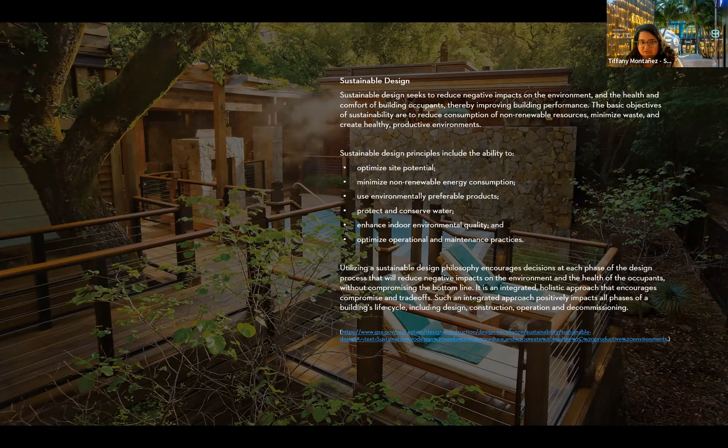Sustainable design principles include the ability to optimize your site potential. What can we utilize from the project site that can incorporate into the overall design of the project? Minimize non-renewable energy consumption. Is there ways that we can integrate renewable energy consumption, which we'll talk about in a bit, using environmentally preferred products, protecting and conserving water, enhancing our indoor environmental quality, and of course, optimizing operation and maintenance practice and the end user, making sure that we're being mindful of that.

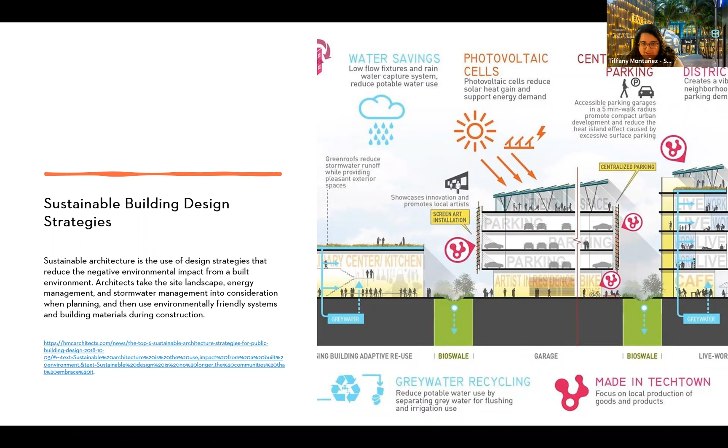Sustainable design strategies are things you can think about pretty early in the project timeline, because many times some of these will have to include specialists. An architect should be aware of many of these things, but more than not, you are leaning on other specialty consultants to advise on these things and make the right decisions. I'm going to go over a few different sustainable building design strategies that can be utilized in your project.

So the first one is passive sustainable design. Passive strategies, such as orienting your building to optimize how much sun is coming in, or if you want to minimize how much sun is coming in, making sure your orientation is accommodating to that. Being thoughtful about where window placements are, operation, maximizing wind if that is an option on your site, location of trees that may be existing.

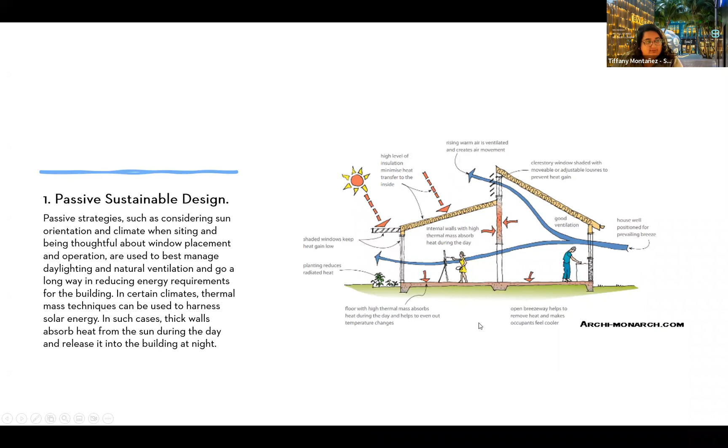Here you can see in this diagram there's different passive strategies in the sense that it is installed - it's not actively doing something, which we'll get into. We have the sun and we have a shading device that's limiting how much sun is being filtered into this space, or making sure our roofs have a good amount of insulation to control how much heat is transferred on the inside. If there's less heat transferred on the inside, your AC is not working as hard. Positioning windows and openings so that you have good airflow, also minimizing ceiling fans or limiting how much AC you'll have to use. These are all different forms of passive sustainable design.

And then you have active sustainable design. Architects will consult with mechanical, plumbing, electrical engineers to implement high efficiency systems that are designed to have a smaller environmental footprint - this project looks pretty big, but smaller. We're trying to be as least wasteful as possible, both in how we design passively to make sure things aren't working overdrive, and how we can filter atriums and green space and shading devices and different envelope systems to consider.

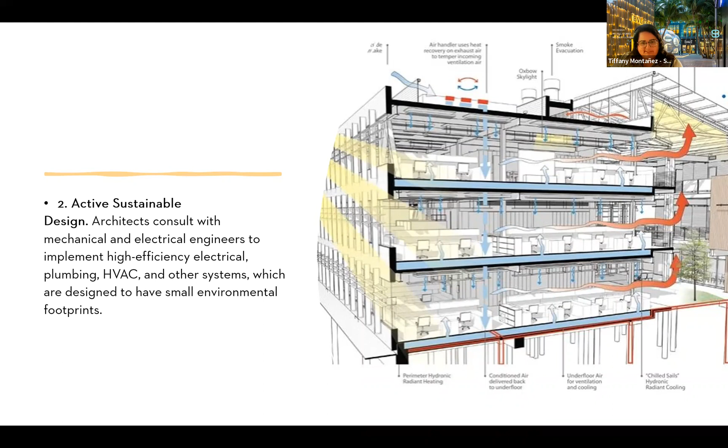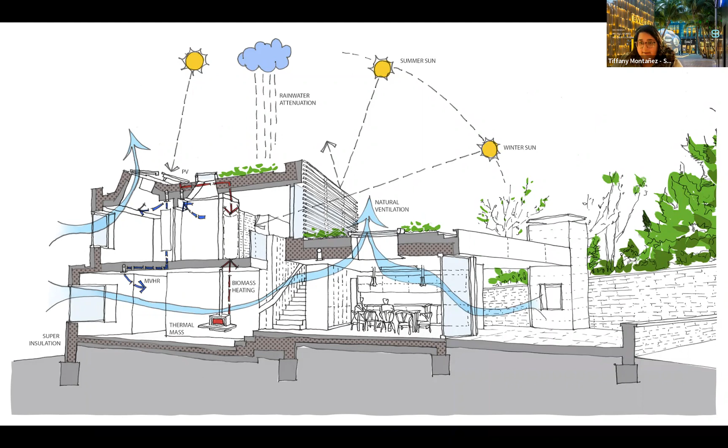How are you taking advantage of summer sun and winter sun? Summer sun is higher in the sky than winter sun. So in places like the Northeast, you want the winter sun coming into the space to warm it up, versus in the summer you'd want it as shaded as possible to keep it cool. Again, strategically placing where natural ventilation can flow through the space — these are just a few examples one can utilize.

As I'm sure you're learning, there's a lot of players that go into building a project.

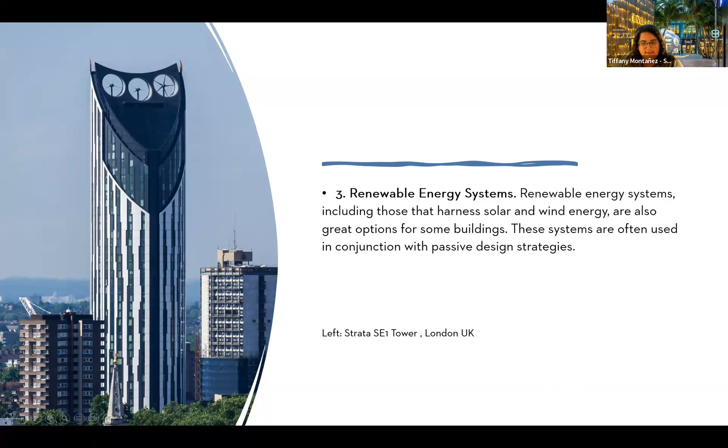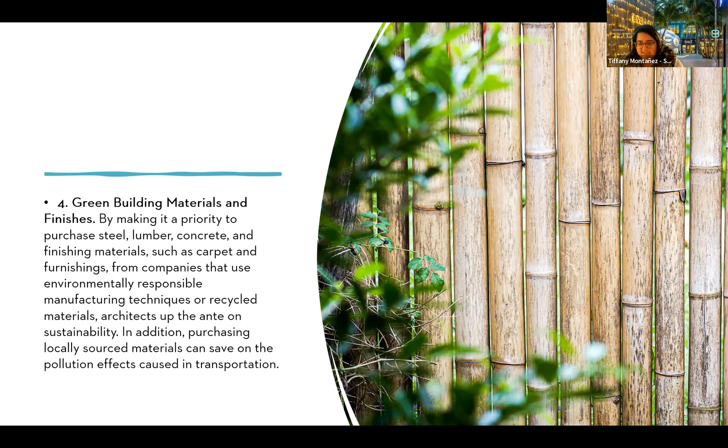Green building materials and finishes — an opportunity to be mindful not only of what products you're using, but where you're getting them from. Local is always best, not only for your carbon footprint. If you're working on a project in Puerto Rico and the roof tile you selected is only manufactured in California, that's traveling quite a ways, instead of utilizing something manufactured in Florida or closer to the island. So always be mindful of those things, making sure to utilize as much recycled material as possible. In the Caribbean, you're dealing with a lot of moisture, and certain materials will survive well and others won't, so selecting products that will thrive in the environments we're building in is also very mindful.

And then also native landscaping. Landscaping makes a huge impact on our projects. We're very lucky in South Florida to constantly be around lush environments. However, you want to be thoughtful and use plants that will actually grow in the environment you're in. If we're doing a project in Boston, planting palm trees probably isn't the best idea, even if we really want them, versus here, where palm trees, sea grapes, and all sorts of tropical plants do really well. Choosing native planting allows us to be mindful of how much water we're using, because we want plants to be successful — we don't want to replace plants often, and we want them to survive in their environment.

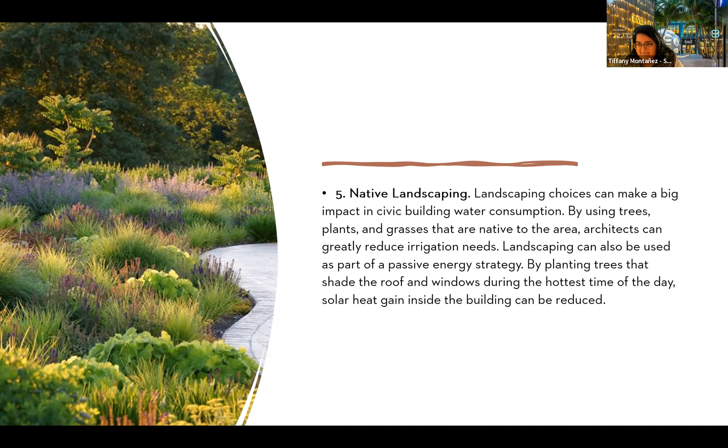Then stormwater management — something South Florida deals with intensely, in an area where for six months we're getting tons and tons of rain. And as we know, with sea levels and all those things, we need to be mindful. How are we getting water off the site? How are we collecting it? Are we reusing it? Is there purification that needs to happen? These are all coordinated with site engineers and civil engineers. You just need to make sure you're making space for those things, because those systems require space — we can't have a water collection plant without some form of tank or cistern to recycle as much of it back into the property.

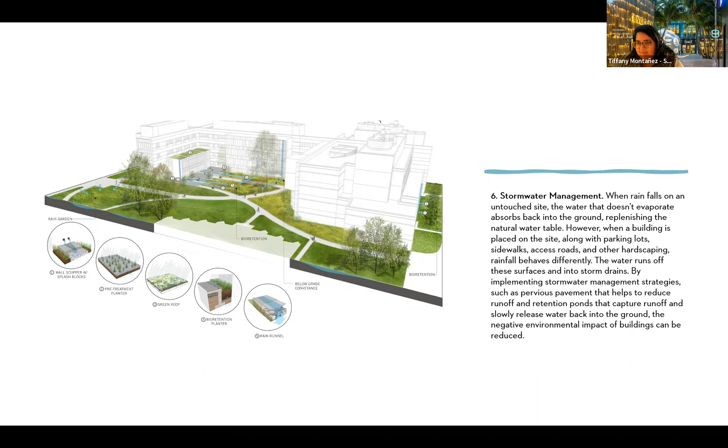Now the next component we're going to get into are different forms of certification. I'm going to go over LEED certification and WELL certification. A LEED building — this isn't a requirement for buildings to pursue, but if you're planning with a large sustainable component in mind, a lot of clients, developers, and projects will submit themselves for certification. You can be LEED certified, and then there are different tiers: silver, gold, and platinum is the highest rank you can get.

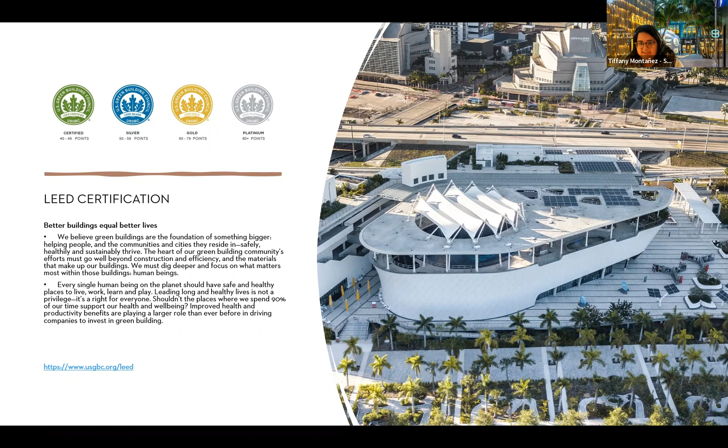And it is developed on a point system, which you'll see in the next slide. This is the Frost Museum here in Miami, that is also a LEED certified building. And then I placed a link, which you'll all get this PowerPoint.

So you can look through some of the resources available on these different certifications. LEED certification is a big matrix of different components: sustainable sites. Examples, are you near a bus stop? Do you have bike racks? Are you near public transportation? Do you have to use a car to get to the space? How efficient is your water system? Your energy and your atmosphere, how efficient are those? Are you using green power? Are the sources of energy you're using, do you have backup?

Materials and resources. Are you using local materials? Are you getting wood from Brazil all the way over here? Or are you being- oops, sorry, there's a dog in our office, sorry for the barking.

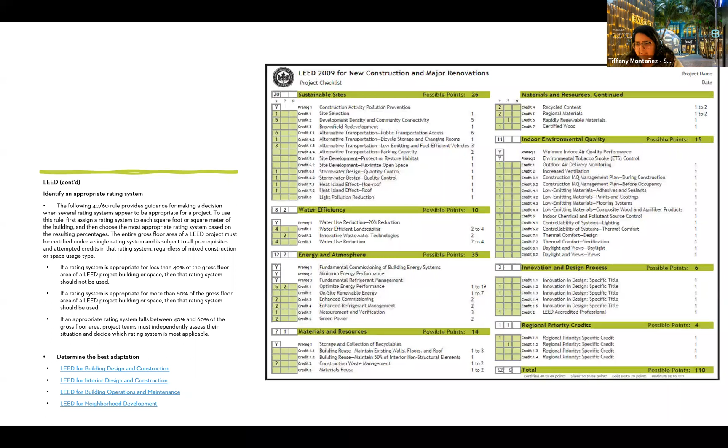Again, with indoor environmental quality, do you have good air quality in your space? Are you creating a healthy space? Which we'll get a little deeper into. And then what does your design process look like? Regional priority, and then it all collects into your possible 110 points, which this may have changed. I think it definitely has changed since from 110, and then what you can collect.

So, the WELL Building Standard is a vehicle for buildings to organize and deliver more thoughtful and intentional spaces that enhance human health and well-being. I would often describe LEED's initiative to be very much environmental focused, and well is that too, but it's also about how it impacts the end user and how it's impacting the individual within the space. So it's leaned on a lot of medical practitioners and professionals and public health experts to identify what that standard is. I think within the last decade more well certifications are popping up, and pursuing that certificate has become more relevant.

And similarly, it has a scaling system to grade yourself to. So there's 10 concepts of well: air, water, nourishment, light, movement, thermal comfort, sound, materials, mind, and community. So we'll go through air, water, and nourishment.

Air: promoting clean air to minimize human exposure to harmful contaminants in order to maximize productivity, well-being, and health. Water: increase adequate hydration in the building's occupants and reduce the health risk due to contaminated water and excessive moisture within buildings. Nourishment: support healthy eating patterns by increasing access to healthier food and beverage choices and limiting access to highly processed food and ingredients. In this first component of well, we're already starting to see the integration of the user and less of the building and its environment, just integrating that as one big thing.

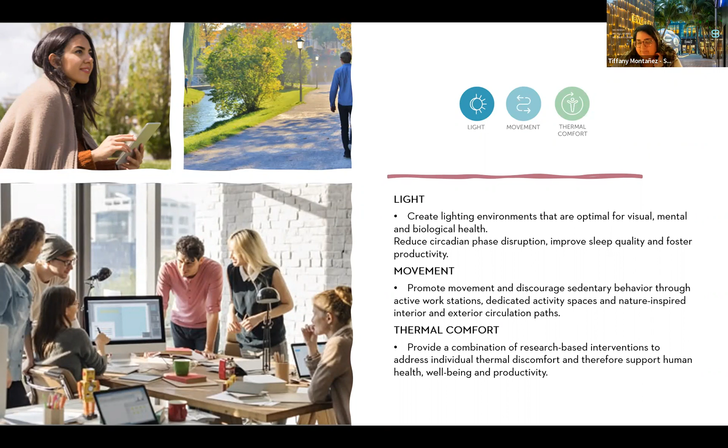The next few categories: sound, materials, mind, and community. Sound: identify and mitigate the acoustical comfort parameters that influence occupant experiences of the built environment. If you're in a library with the same acoustical echoing as a theater space, you're probably not going to be able to utilize that space as productively as you'd like. And vice versa, you wouldn't want a theater that's so silent it's not maximizing its acoustical abilities. Materials: identify, evaluate, and manage hazardous ingredients across building materials, waste, cleaning products, outdoor spaces, and landscaping to reduce risk of exposure.

Mind: implement nature-inspired design, create restorative spaces to promote resources supporting mental health, sleep support, substance abuse, and emotional well-being. And community: design buildings that are inclusive, accessible, healthy, and safe. Create policies and programs that support the needs, health, and wellness of all individuals and families. It's always great to design a wonderful project or building, but it's even better when a community can really take advantage of that.

And that's what that scoring looks like. So there are a few more categories here. It goes from bronze to platinum being the highest, and the total points achievable are 80.

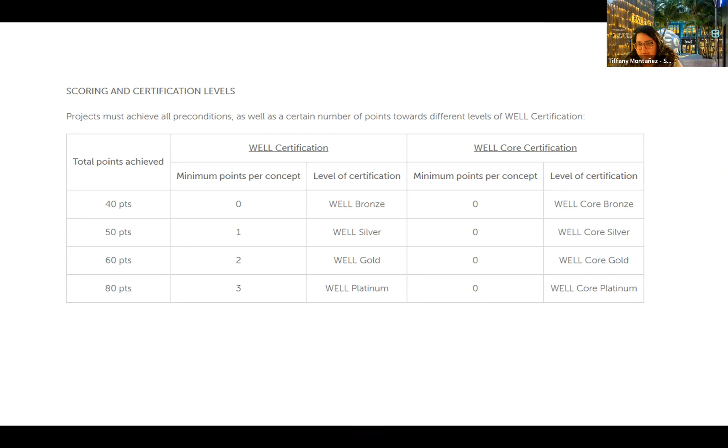We're going to go through two different case studies. First, a WELL-certified case study. This is a project in San Francisco. It was WELL-certified gold.

Some of the design highlights include maintaining extensive natural daylight and a high level of transparency that conveys the company's commitment to community sustainability and promoting employee engagement. The building's form and strategically placed louvers allow for natural ventilation on the lower 3 floors 95% of the year, significantly reducing energy consumption. The gray water system reclaims water from the showers for flushing and irrigation. The design team and client group understand the potential of the space to educate occupants and bring better awareness to its end users.

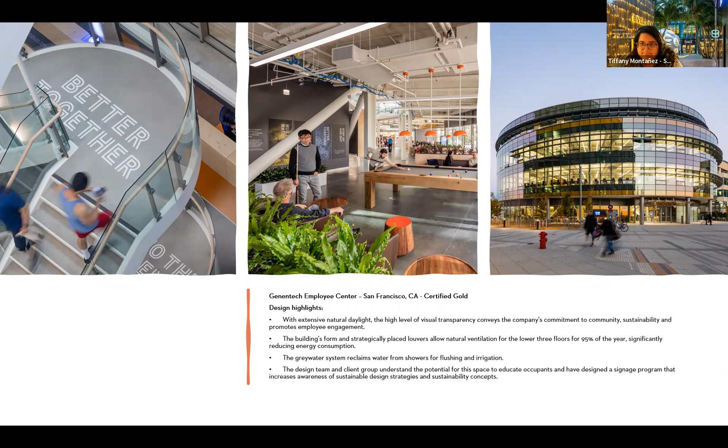It is located at the National University of Singapore School of Design and Environment and is the first purpose-built net zero building in Singapore. It's a 6-story building with a living laboratory to demonstrate and explore human-centric approaches for integrated sustainable development. It's a testament to the university's commitment to incorporate sustainability in various aspects of campus life, not only operations, but construction, research, and education. The building is energy efficient and environmentally friendly, with a suite of innovative building strategies to improve comfort and well-being for its users.

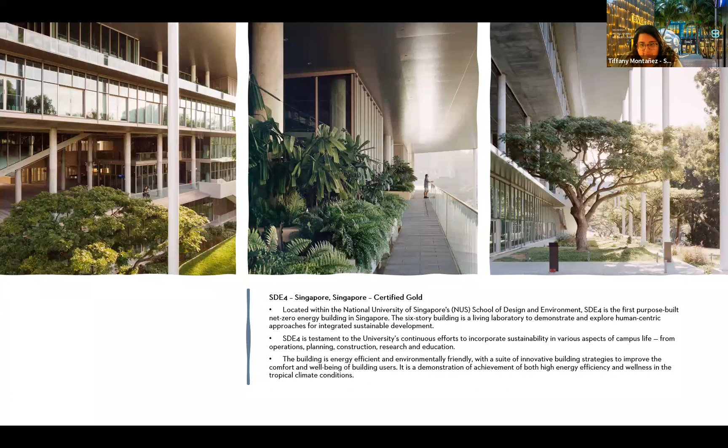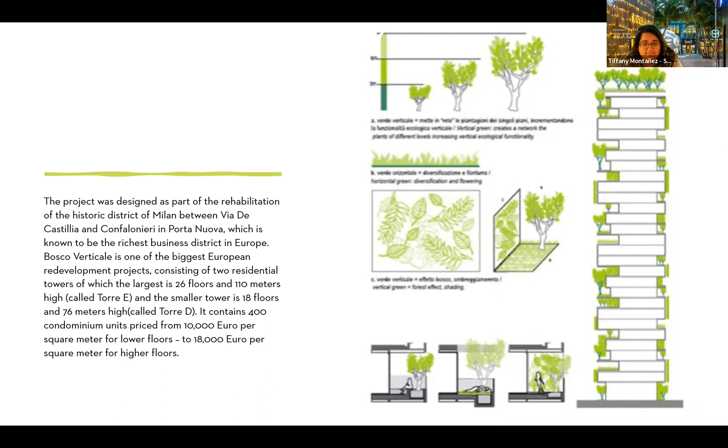And a more academic architectural case study in Milan. The project was to create a vertical garden in Milan, known to be the business area in Europe. The idea was for it to be 26 floors, about 110 meters high. The building itself used renewable energy from solar panels and filtered waste to sustain the building's plant life.

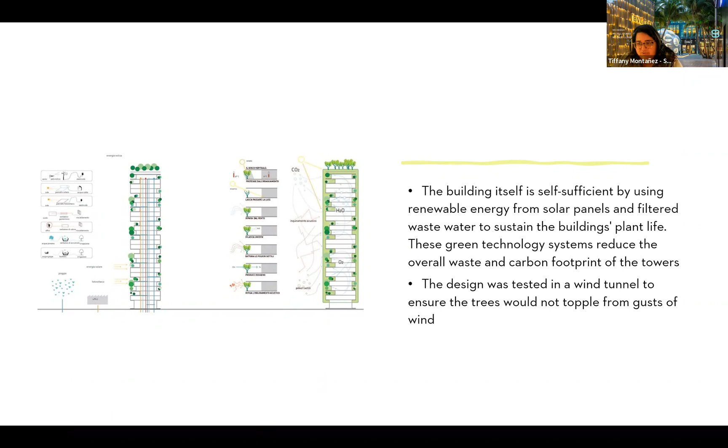I think what solar panels used to be 20 years ago versus now is very different—there's even glass that has solar panel systems in it, and roof tiles so thin they don't look like the more traditional PV systems. The design here was very much about integrating as much greenery as possible, and it was tested in a wind tunnel to make sure trees wouldn't topple from gusts of wind. Also, being realistic, it's not going to be green all the time, so what does it look like when it's changing seasons or in between? How do you encourage biodiversity in the project?

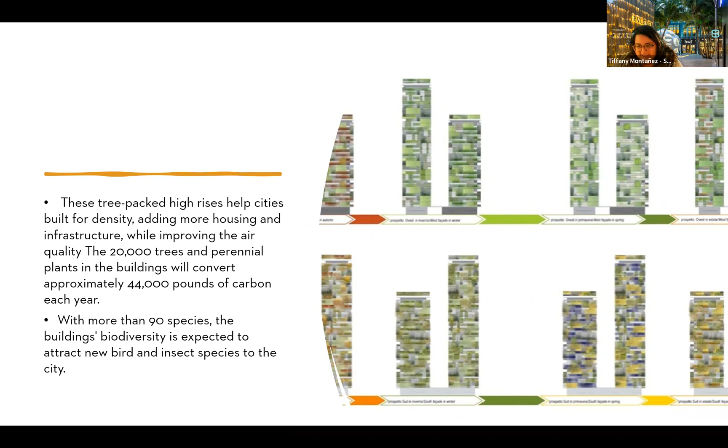So with that, I think that was a great crash course or a great intro. I'm sure any of the other mentors who are sustainable designers or consultants could probably add about 600 more slides, but that'll be the end for us here.